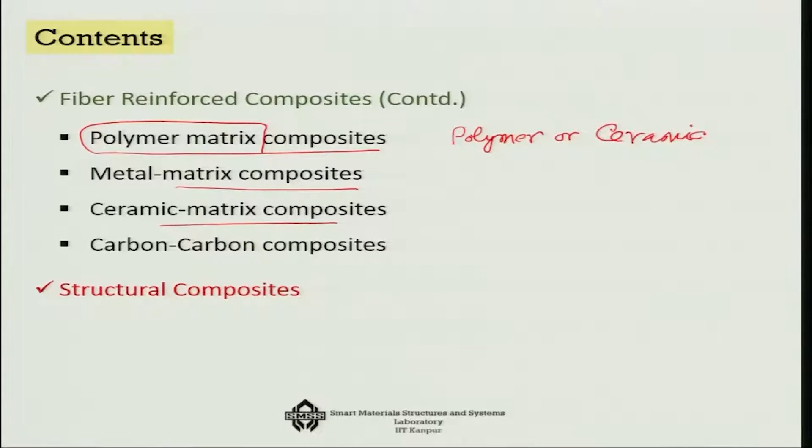When we are talking about metal matrix composite, the reinforcements will be either metal itself as a metallic fiber, or ceramics. Polymer and ceramics are chosen for polymer matrix composites because of matching coefficient of thermal expansion, and also strength and the interlocking that takes place between the fiber and the matrix. The fabrication process also plays an important role. This is metal matrix, and for ceramic matrix composite it is the same thing, metal or ceramics.

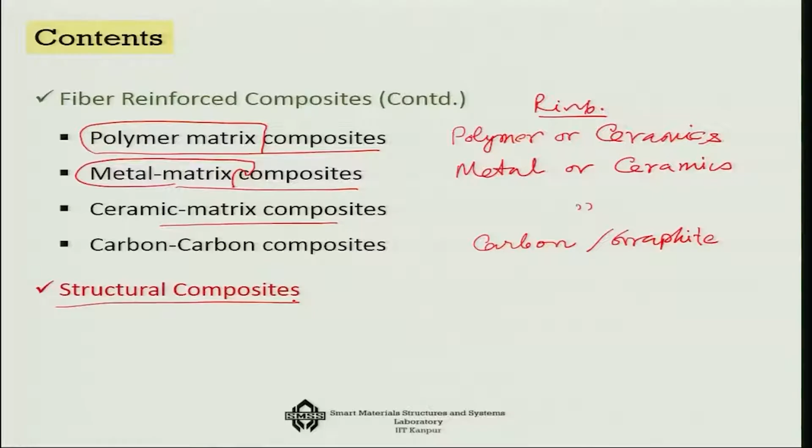For carbon-carbon composites, carbon itself is the matrix and carbon itself is the reinforcement, mostly in carbon or graphite form. This is what we are going to have an overview on, and then finally we are going to talk about structural composites - that means how you make a composite layer by layer.

Now let's first talk about fiber reinforced composites. The first example of such composites is GFRP, that is glass fiber reinforced composites, and that name itself is telling us that the reinforcement is glass fiber.

When we talk about glass fiber, there are various types. There is E-glass fiber, for electrical purposes and insulations, which was discovered first, so it is important. Then there are specific glass fibers like S-glass fiber, which is good from strength point of view, available today as a special type, and also C-glass fiber, which is good from the corrosion point of view.

However, the most common one is actually E-glass fiber, and the most common matrix is epoxy polyester resin. The diameter of this fiber is between 3 to 20 micrometers. Typically in each fiber, if you look at the composition, you will see about 55% silica, which has the major composition, then 16% calcium oxide, 15% alumina, 10% boron oxide, and 4% magnesium oxide - all these together make the glass fiber.

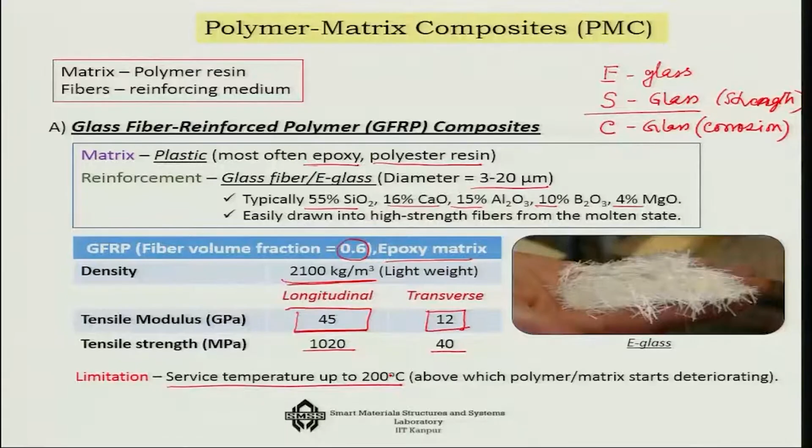But the limitation is that the service temperature should be up to 200 degrees centigrade; it should not go beyond that. If it goes beyond, then the flow will start, or the degradation of the matrix will start. So this is the limitation, temperature-wise.

There are many applications, like automotive and marine bodies. Many sports yachts, for example, are actually made of glass fiber reinforced plastics, because that way you can make it very light. Then plastic pipes, storage containers, industrial floorings. You can see this is a typical ribbed bar, made of GFRP rebars, which is used for making pedestrian bridges.

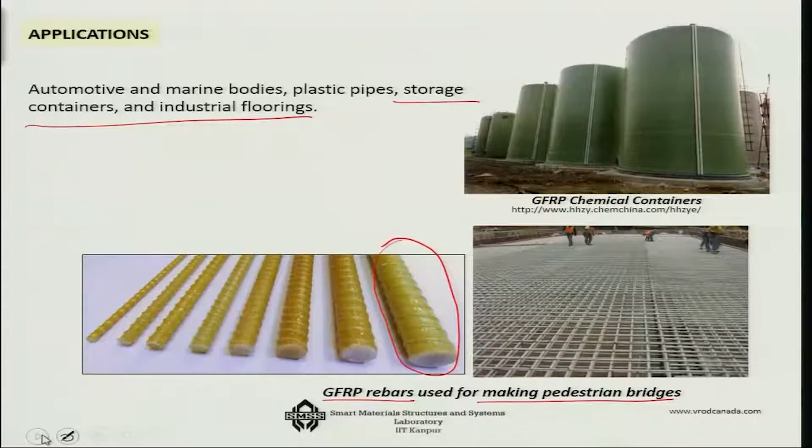So there are varied applications, and GFRP is coming up to be one of the most widely used composites because of these advantages.

The next composite, which has very high performance applications, is carbon fiber reinforced polymer composite. So carbon fiber, if you look at it, once again I will show you how it looks like. These blackish things are the carbon fibers, and they come in various forms.

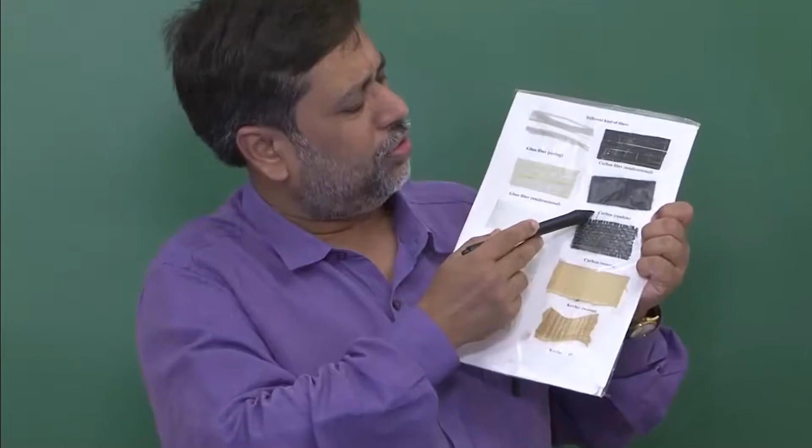This is unidirectional fiber, and then you can have carbon fibers in a woven form, or in cross plies or prepreg forms, with random orientations, etc. You can have carbon fibers in various forms. So these three examples shown here are forms of carbon fibers.

So just like GFRP, you can make carbon fiber reinforced composites. Now, carbon is a very high performance fiber compared to glass fiber. It has very high specific modulus, E/ρ ratio, that is modulus of elasticity to density ratio, and also a very high specific strength.

So with the same 0.6 volume fraction, and fiber diameter about 4 to 10 micrometers, you achieve here a density of 1600. That means carbon fiber is actually lighter in terms of density. The density of the carbon fiber is lighter than the density of the glass fiber.

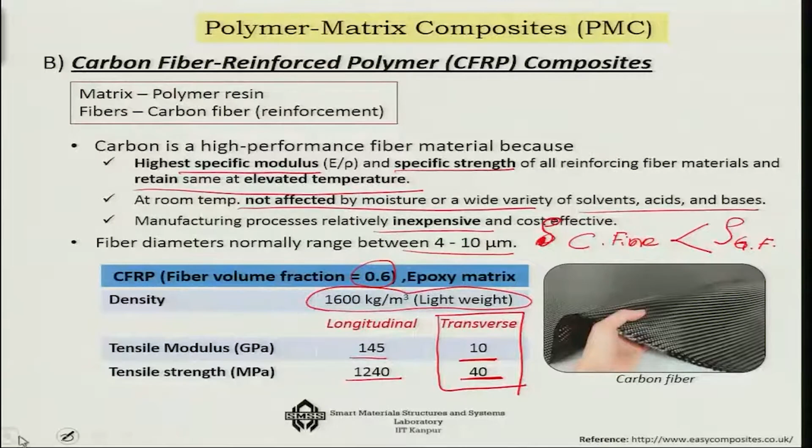So this anisotropy is something one has to keep in mind while making a structural composite out of this system. These are various applications of carbon fiber composites.

As you can see, this is a BMW carbon fiber wheel. This is the steering wheel made of carbon fiber, and then there are special seats, etc. So there are many applications of carbon fiber.

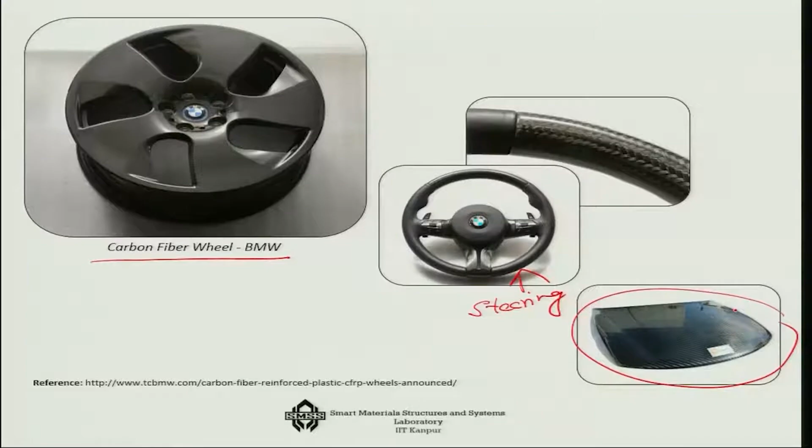You will see bikes, for example, mountain bike frames. The 787 Dreamliner has nearly 50% of its frame made of CFRP. And another interesting application is in racing cars like the Lamborghini Aventador, where CFRP is used in its wheels, its frames, and in the seats itself.

CFRP is also getting a lot of use in sports goods, for example rackets. By making it light but strong, you can save a lot of muscular energy and hence improve performance in a game. Thus CFRP is very well popular in such sports applications as well.

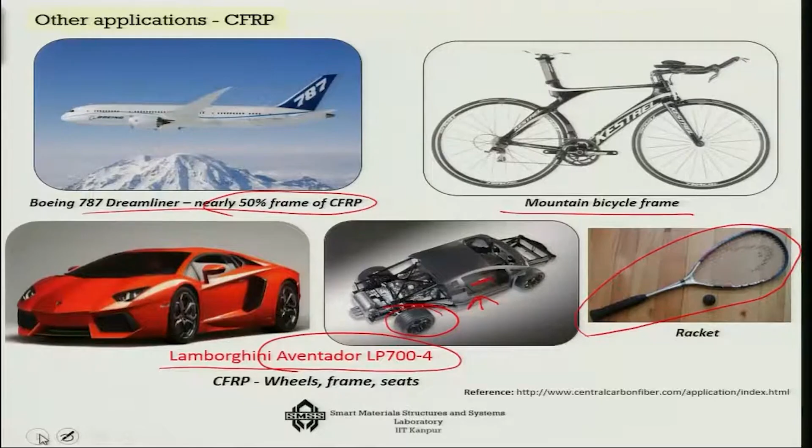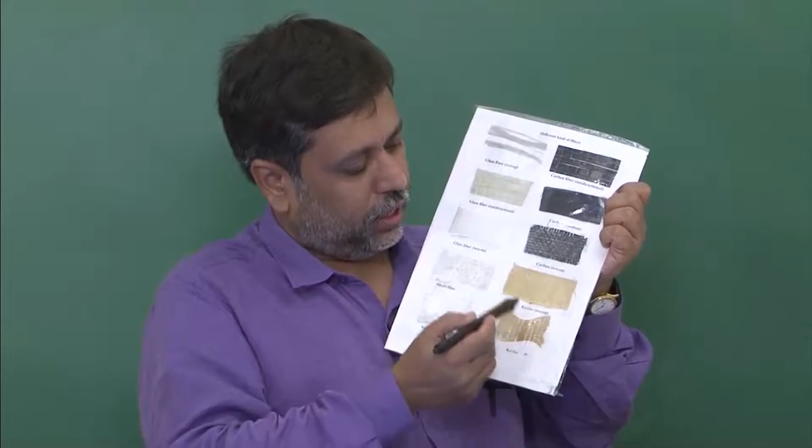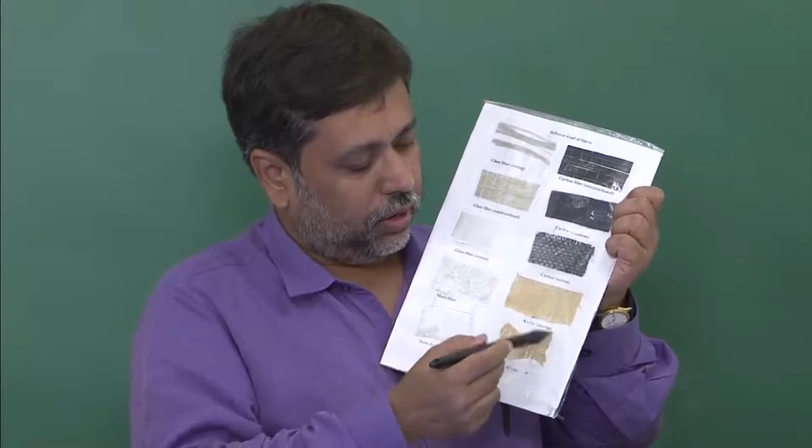The third one in the polymer matrix composite that is equally important in terms of application is aramid fiber reinforced polymer, AFRP. Like the last two, which are glass fiber and carbon fiber, but in this case the fiber is polyaramid fiber. Once again I will show you how it looks. These yellowish ones are the polyaramid fibers. You can get it in various forms, as simple fibers as well as woven fibers, so woven cloths, bidirectionals. These are actually Kevlar or Nomex, that is the name of such a system.

This is very much known for its toughness, impact resistance, resistance to creep and fatigue failure, and the reason for its high strength is the axial covalent bonds. However, it is very anisotropic. It has weak hydrogen bonds in the transverse direction, and it has negative coefficient of expansion due to kinks. That is also another interesting point to keep in mind while designing, and it is UV sensitive. That is a little bit of a negative side, that it degrades under UV exposure.

Kevlar with a 0.6 volume fraction has a density of only 1440, so it is even lighter than CFRP in some cases, and definitely lighter than GFRP. If you look at the tensile modulus, it's close to aluminum, 76 GPa in the longitudinal direction; in the transverse it is pretty weak, only 5.5, and this is tensile modulus. The tensile strength is 1380 MPa in the longitudinal direction and 30 MPa in the transverse direction.

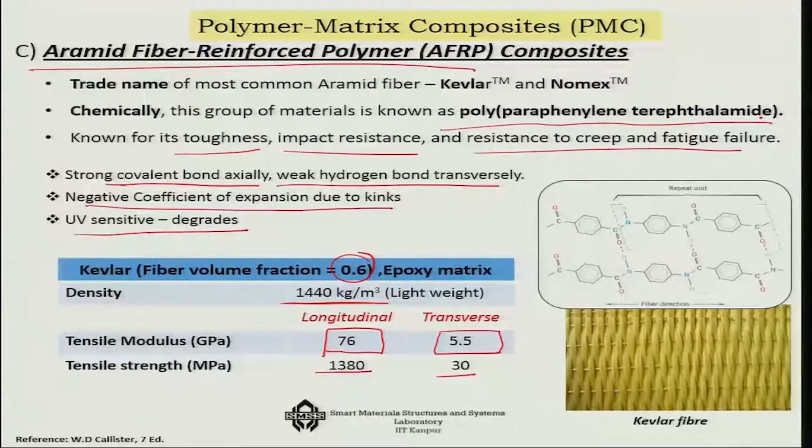One important thing to keep in mind is that in terms of fibers, glass fiber is inorganic in nature. Carbon fiber, well, you may call it inorganic or organic, but definitely the aramid based fiber is an organic fiber. That organic fiber is actually polyparaphenylene terephthalamide or similar such fibers. So that is about the Kevlar fiber.

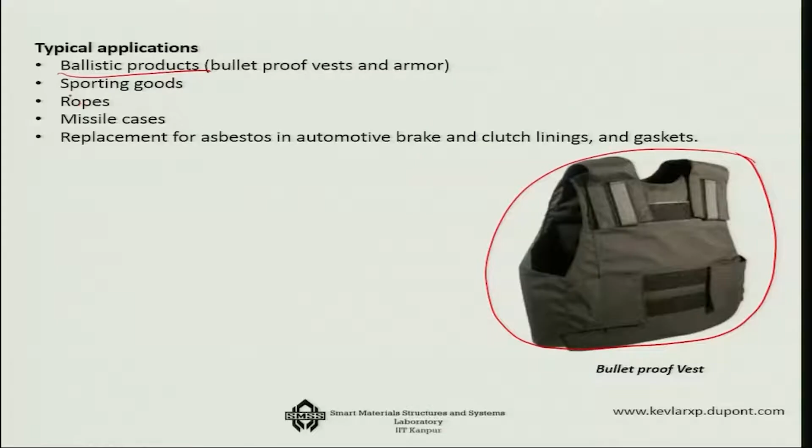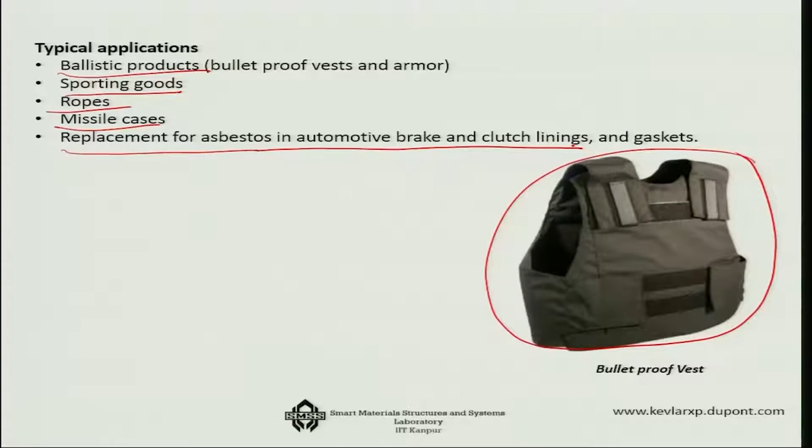Typical applications: one of the most important today is for BPJs, in other words bulletproof jackets or vests, because of its lightweight but high shock absorption capability, so it is used in ballistic products. It is also used in sports goods, ropes for climbers, missile cases, and in many cases it works nicely as a replacement for asbestos in automotive brake and clutch linings. Asbestos is a good fiber, but the problem is that it is injurious to health, so in such cases this particular fiber works very well as a replacement.

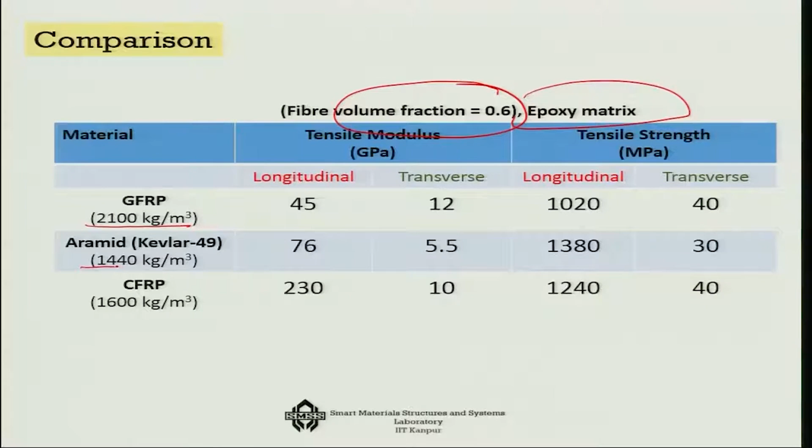Now if we compare the three types of composites with the same volume fraction of 0.6 and the same matrix, epoxy, otherwise it will not be a fair comparison: GFRP density is the highest at 2100. Polyaramides are in the middle at 1440; in fact they are the lightest. CFRP is 1600. So you can call polyaramide the lightest and GFRP the heaviest among them.

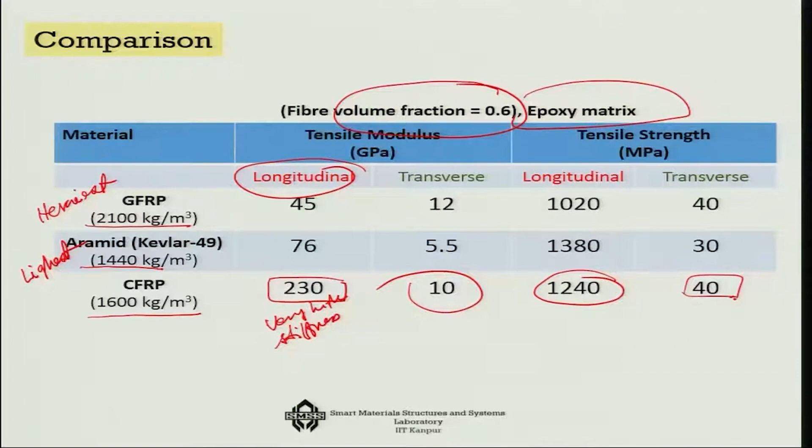If you look at it from the stiffness point of view, CFRP is very stiff, very high stiffness, in fact close to steel, somewhat more than steel in the longitudinal direction. In the transverse it is only 10, and tensile strength wise it is close to steel, that is 1240 MPa, whereas transverse it is about 40. So in many senses, other than density, CFRP is better because it has higher modulus of elasticity and higher strength compared to the other two materials which are mostly used.

Now I will talk about metal matrix composites. In the metal matrix composite, the fiber can be either metal or ceramic. But polymers typically are not used because they cannot sustain high temperature, and also there is a mismatch of coefficient of thermal expansion and conductivities, etc. Matrix wise, it is ductile metal, usually alloys of aluminum, magnesium, titanium and copper, and fiber wise it can be carbon fiber, silicon carbide, which are inorganic fibers, then boron fiber and aluminum oxide, which is a ceramic fiber.

Any one of these fibers can be used in the metal matrix composite. The advantage over PMC is definitely high operating temperature, non-flammability, and greater resistance to degradation by organic fluid. In many chemical plants there are organic fluids which can contaminate the pipelines, so this MMC is much better in all such cases, including good operating temperature.

In fact some of the MMCs, if you look at it, like carbon and aluminum as matrix, you can get a very high tensile modulus, something like 320, and the strength is something like 620. This is very high considering the density is only 2.44.

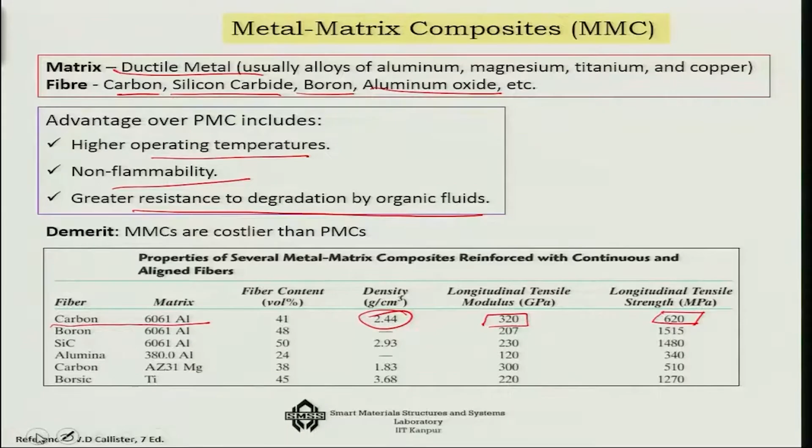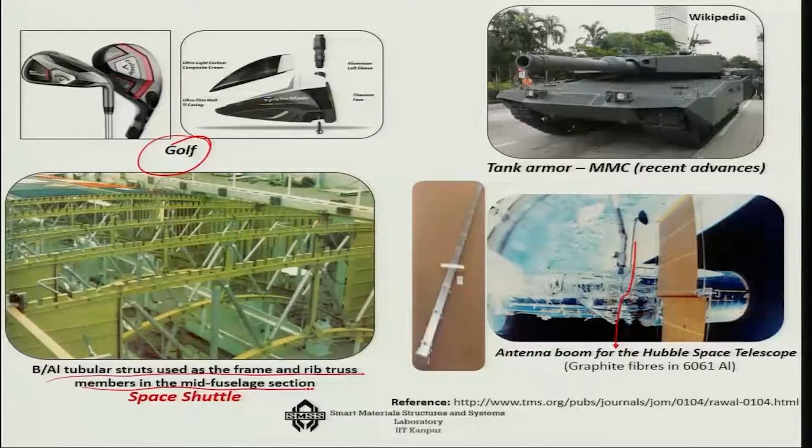Similarly, if you look at all of them, you will get an idea of where exactly we are in terms of metal matrix composites, and in most all cases it is much better than the single metal based system. The places where you can use it include golf, and tubular struts used as frame and rib truss members in the fuselage section for aircraft applications. Then the antenna boom for Hubble Space Telescope for space application, or tank armor MMC. So there are many such varied applications of metal matrix composites.

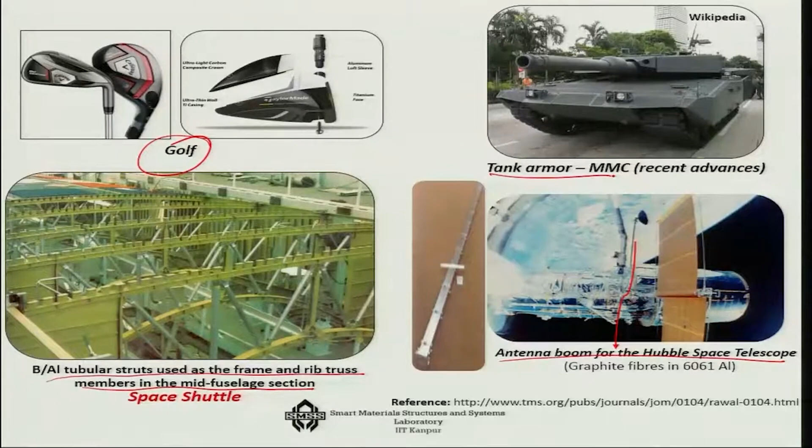Now we will talk about the ceramic matrix composite. Ceramics are highly brittle in nature, we know that, and have low fracture toughness. So you have to handle them very carefully. That's the first important thing.

In fact, to handle the ceramic fibers, we do something known as sizing. Sizing means you take a ceramic fiber and apply an oil coating over it. What coating you are giving is a trade secret, because that enhances the life of the fibers and increases the fracture toughness.

Now in general the fracture toughness of ceramics is only about 1 to 5 MPa root meter, and for metal it is about 20 to 90 MPa root meter. So when using CMC, your target will be for the fracture toughness to lie in the range of 6 to 20 megapascal root meter.

Now crack initiation normally occurs within the matrix phase, whereas crack propagation is generally hindered by the particles, fibers, or whiskers inside the matrix, which will stop the growth of the crack. It exhibits improved high temperature creep behavior and resistance to thermal shock. So these are some of the very good characteristics of ceramic matrix composites.

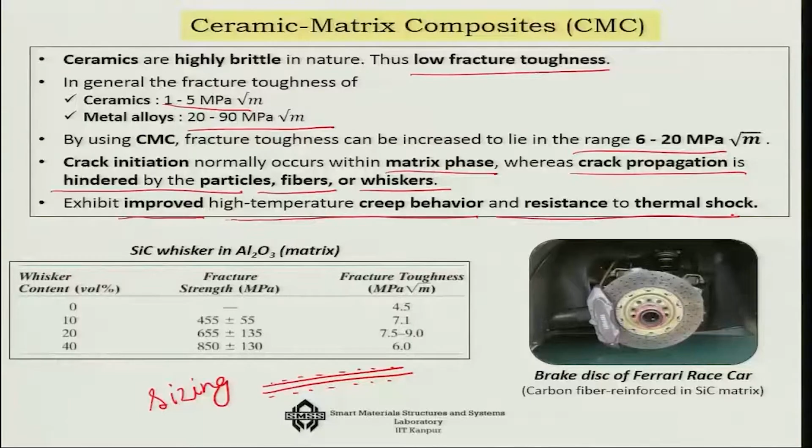There is one interesting ceramic matrix material, I don't know whether we will call it a composite or not, but cermet. Cermet is actually a composite of ceramic particles which are very strong and brittle, kept in a soft and ductile metal matrix. It has higher stiffness, toughness, and wear resistance than traditional materials.

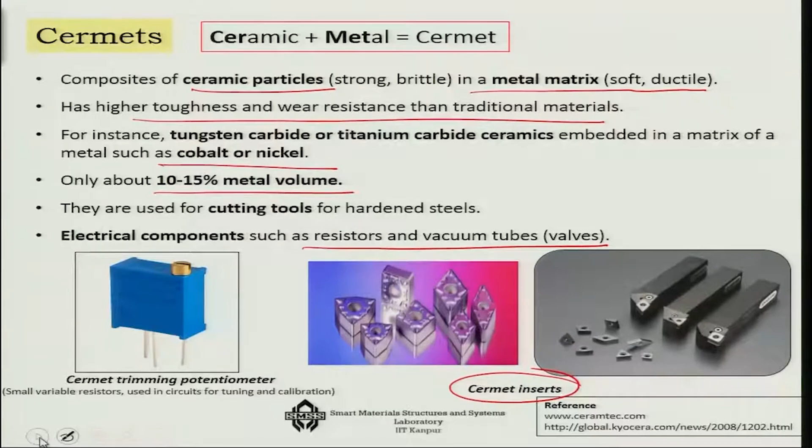For instance, tungsten carbide or titanium carbide ceramics embedded in a matrix of a metal such as cobalt or nickel, with only about 10 to 15% metal volume. It is used for cutting tools because you get very good hardness, and also in electrical components such as resistors or vacuum tubes. Here are some examples, as you can see, of cermet trimming potentiometer, cermet inserts, etc. So that is ceramic plus metal together producing something called cermet.

Next is the carbon-carbon composites, where the carbon is the fiber and carbon is the matrix. It's very expensive because the procedure to make it is also very expensive. It has a high modulus of elasticity up to 200 GPa and high strength, and it can retain its properties even up to 2000 degrees centigrade, which is a very high temperature.

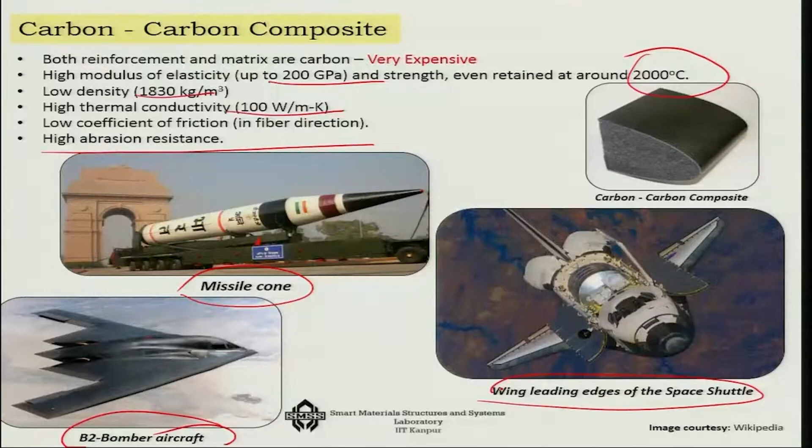Also it has low density, high thermal conductivity, low coefficient of friction, and high abrasion resistance. That is why it is used in missile cones, in B-2 bombers, and in wing leading edges of the space shuttle. So wherever there is a very challenging environment, we actually apply these carbon-carbon composites.

Now finally, I will talk about the structural composites, which means how do you make them layer by layer. As explained in the last class, a laminate is constructed by stacking a number of laminae. Examples are unidirectional laminate, where the fiber orientation angle is the same in all lamina, such as 0 degree, or cross ply laminates where it is like 0, 90, 0, 90.

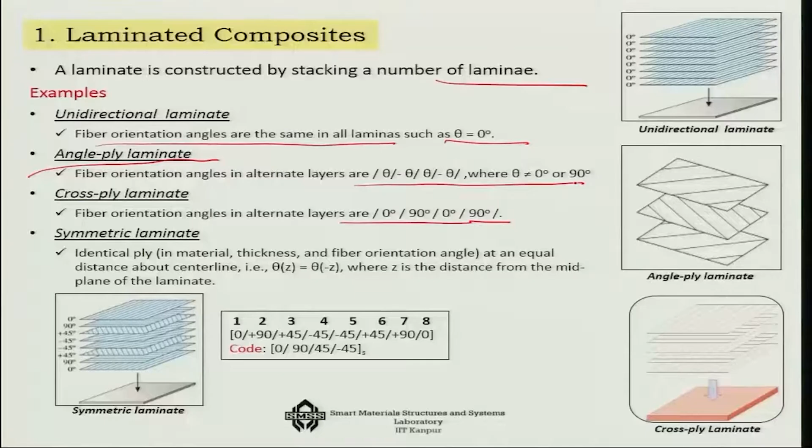If you want to put any other arbitrary angle of the fiber, then we call it angle ply laminate, which is like theta minus theta, theta minus theta, etc. More importantly, you can stack them such that with respect to the mid plane, they can be either symmetric or unsymmetric. There are many variations that you can develop, and each has its own characteristics.

Now if you consider a symmetric laminate, if there is a bar over such a sequence like 0, 45, 90 bar, that would mean the plane of symmetry passes midway through the thickness at this particular line. For adjacent plus 45 minus 45 plies, you can put it as plus minus 45. For adjacent 0 degree plies, whatever numbers are adjacent, you can put them as 0 subscript 4, and two adjacent plus minus 45s grouped can be put as plus minus 45 subscript 2. You can use these code names to describe a symmetric laminate.

Similarly for antisymmetric, suppose there are 4 layers, you can put it in this manner: plus theta minus theta plus theta minus theta. That means for every plus theta, the next layer is actually minus theta.

There is another one known as quasi-isotropic laminate. Quasi means it is only isotropic under certain special cases. For example, consider a composite which has ply angles only at the ratio of pi over n. Suppose it is 3 layers, then it is a 60-degree ratio: 0, plus 60, minus 60. Similarly with n as 4, it is a 4-layer ratio. This is known as quasi-isotropic.

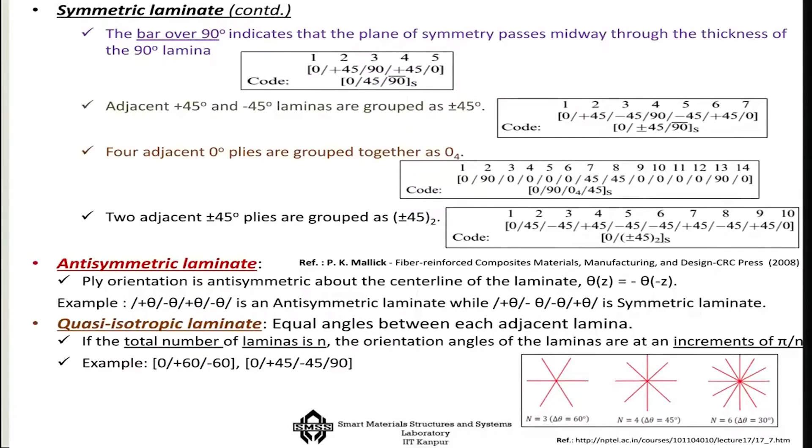The reason is that if the stiffness matrix is found out for such material, the in-plane stiffness does not vary with the direction. That's the telltale sign of an isotropic situation, where properties do not vary with direction. In this case it happens, but only for the in-plane properties. That's why it is called quasi-isotropic, not fully isotropic.

The other structural variation is known as sandwich panels. It consists of two strong and stiff sheet faces separated by a core material or structure. Usually the core material is a honeycomb structure. They try to reduce weight this way. It has an outer sheet of aluminum alloys, fiber reinforced plastic, titanium, steel or plywood, and the core material is actually rigid polymeric foams, for example phenolics, epoxy, polyurethane, and also wood and honeycomb.

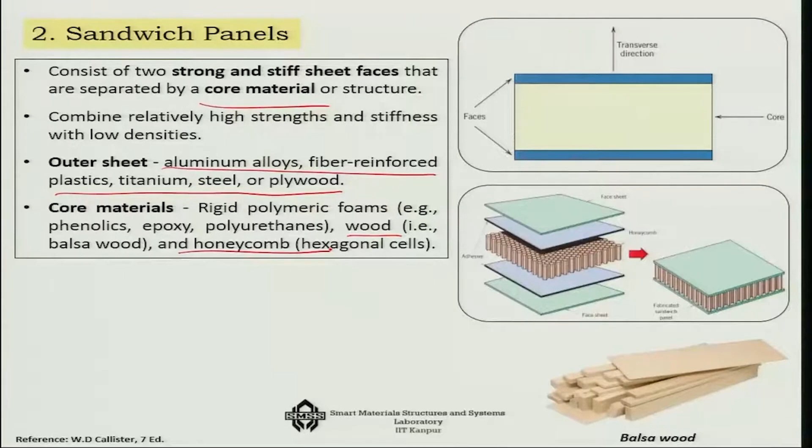So it's one of the lightest materials and technologies in terms of composite material. Sandwich panels are used in various applications for low water absorption, good anti-corrosion activities, and good thermally insulated capacity. So it is very popular in terms of its use.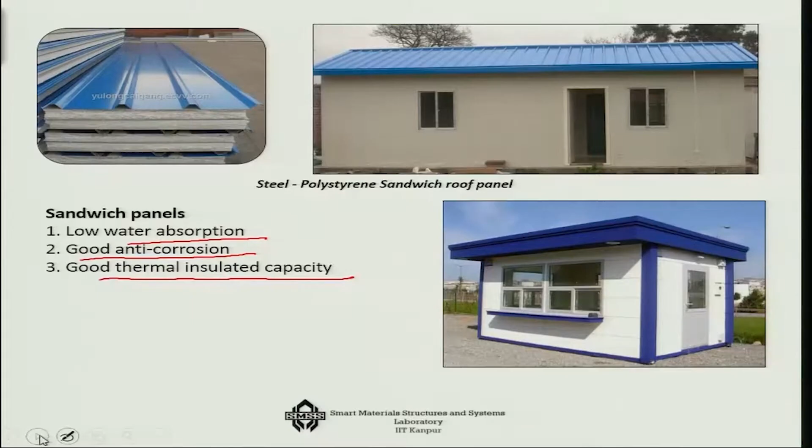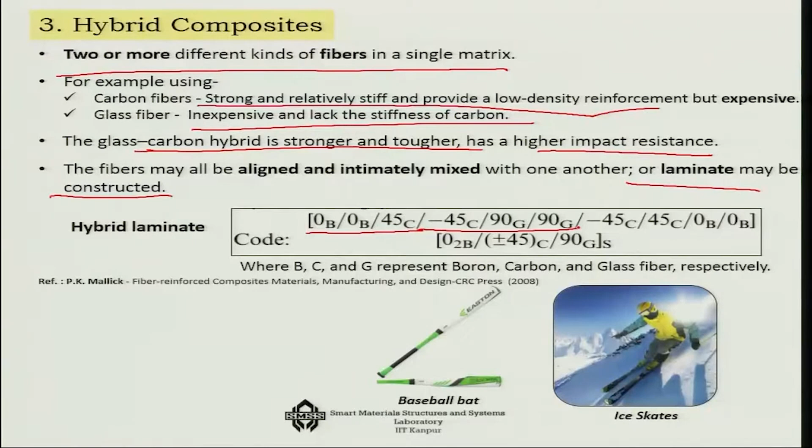The glass carbon hybrid is stronger and tougher, and has higher impact resistance. The fibers may be aligned and intimately mixed with one another, or a laminate can be constructed. So it can be something like, as you can see, 3 layers given, or 6 layers given, so that you can prepare various types of such composites.

So this is where we will close, and in the next lecture we will learn about manufacturing and processing of composites. Thank you.